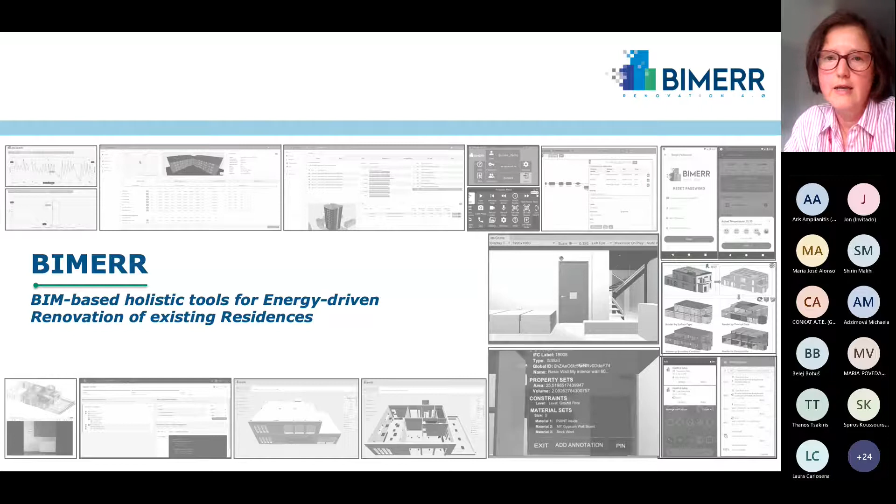I'm Otilia Kaitola, coordinator of the BIMERR project. I would like to also from my side welcome everybody to the final BIMERR Living Lab. BIMERR stands for BIM-Based Holistic Tools for Energy-Driven Renovation of Existing Residences. We are a team of 16 partners working on the BIMERR project, 10 industrial partners and 6 partners from research institutions and universities.

Before we introduce you to the BIMERR tools in more detail, I would like to present what we call the BIMERR Road or BIMERR Path. At the beginning of this path, we have a building to be renovated for which we may or may not have a digital model, more specifically a BIM model. At the end of the road, we'll have a building which has undergone an energy-driven renovation. So what BIMERR delivers is the software tools for in between, so to say, for the whole BIMERR road or path.

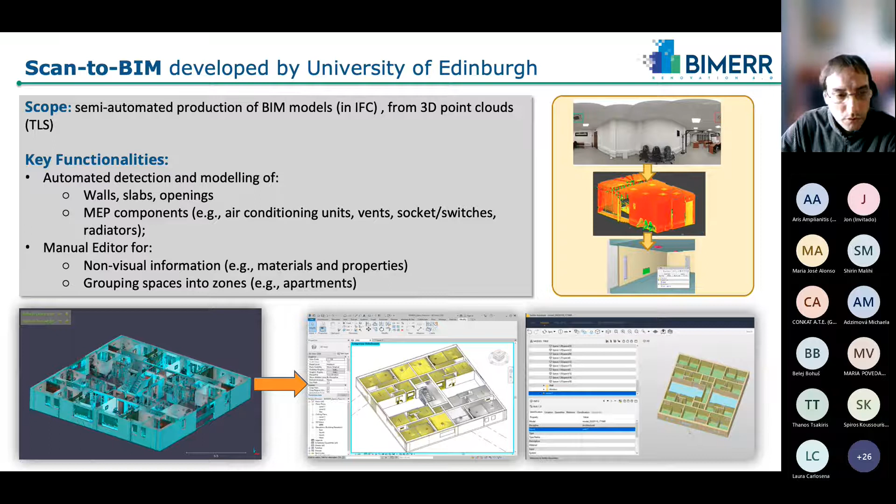This is important for doing energy analysis, understanding and allocating energy sources to where it is consumed. So for example, creating zones like where is there an apartment, so all the rooms that make up an apartment. Okay, next slide, please.

So what have been the lessons learned? We have applied this to a couple of different pilot sites. Very quickly, what we realized is that point cloud quality is very important, and we've been surprised with some of the point clouds we have received. Some of that is not the fault of the surveyor at all.

It's actually the fact that in the context of renovation, very often apartments are inhabited, and so there is a lot of occlusion inside the different rooms. It's very important for the automated process to work effectively that occlusions be reduced as much as possible. So there's a bit of planning and understanding of the process needed by the surveyor, so that they ensure, for example, enough data is acquired of a wall that may be mostly covered by a wardrobe. If there's a little part of it visible, they should ensure it's scanned.

We've gathered all these guidelines into a free guide, a paper we published called Laser Scanning for BIM. You can find that online.

Now, beyond this, we know some of the good performance of the solution. We believe that an automated or semi-automated scan-to-BIM process like the one we propose can save up to 40% in the scan-to-BIM process. Current practices would be to bring the point cloud into Revit and manually model from there, or ArchiCAD and other equivalent tools. But we think a semi-automated process like this can save up to 40% of that time. So really worth considering.

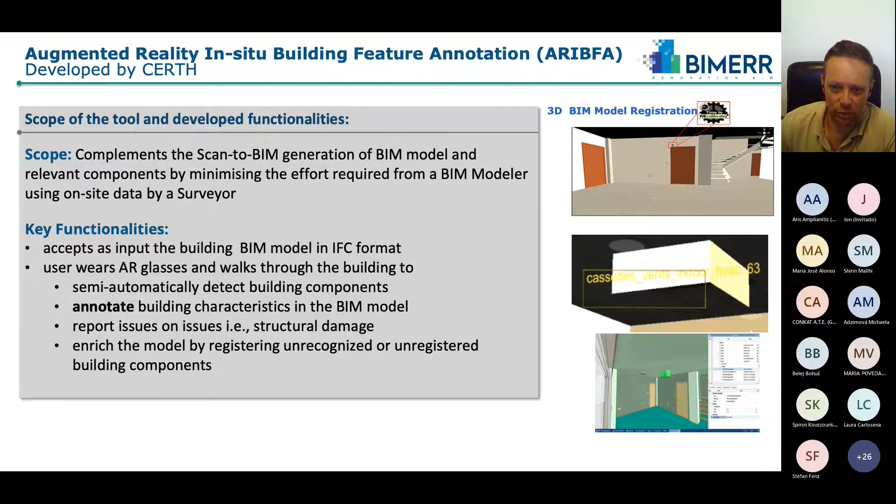Finally, one capability of this tool is to enrich the model by registering unrecognized and unregistered building components within the space. After detection, the user can update the model on our building information management platform, which we'll show in the demonstration video.

Some of the lessons learned through the validation activities performed at the pilot site: for the accurate registration of the BIM model in the actual...

I'm sorry, Maria, you're unmuted. Can you mute please? Thank you.

So for the accurate registration of the building on site, so the BIM model correctly follows the actual building, the 3D model should be split into floors and use a registration image target per floor to have better registration.

Since the application runs on a small device with CPU and RAM restrictions, the IFC editing functionality is challenging, so we cannot directly visualize changes when the user changes, for example, the thickness or dimensions of a wall. This is something to be done at a later stage.

Entering text is a generic restriction of all augmented reality applications. Since you are tapping into the air, it's very tedious for large text editing, such as descriptions of components and activities.

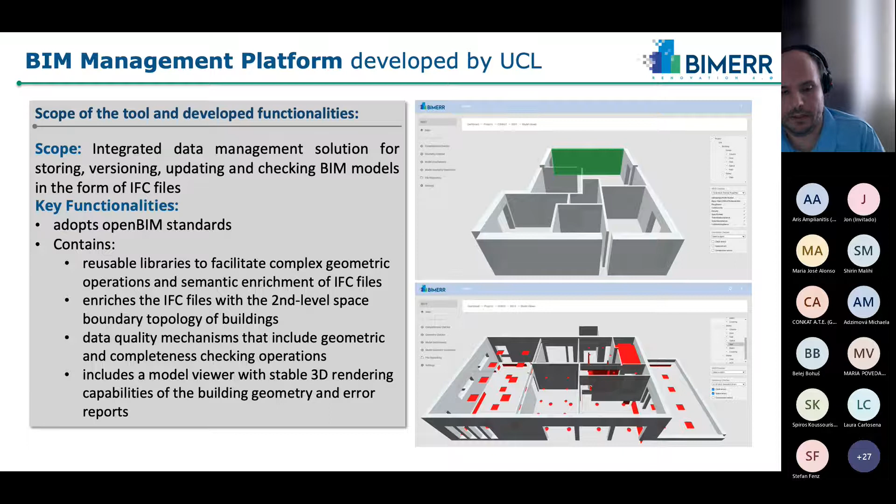Yes, so we have a lesson learned during the validation of this tool. As I said before, the digital twin platform provides OBJ files for the error part, for reporting the errors.

This is very useful for other tools that work in Unity or other platforms like ARIBFA, in order to send these files and visualize in low level all these errors to notify the users. Of course, the BIM management platform also provides other formats for error reporting, such as HTML, JSON, and BCF. We are using the BIM Collaboration Format, BCF, from Building Smart.

As I said before, we use this iterative process, so the designer uploads the file to the BIM management platform. And if the file has errors, we give the possibility to have different revisions of the same BIM model, and using this approach we can track all the changes and improvements of the model until we have at the end an error-free model.

And in order to help this file exchange with users and other BIM software components, BIM authoring tools, we are using ISO 19650 in order to have a correct naming convention for the file names.

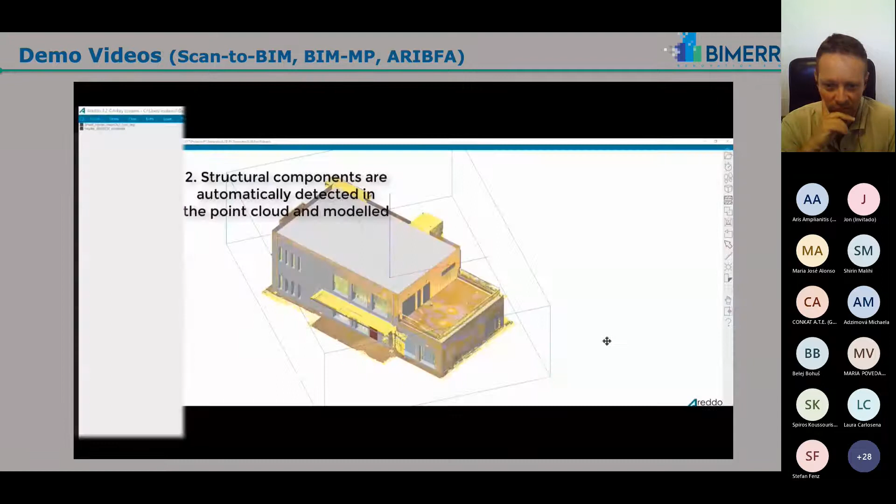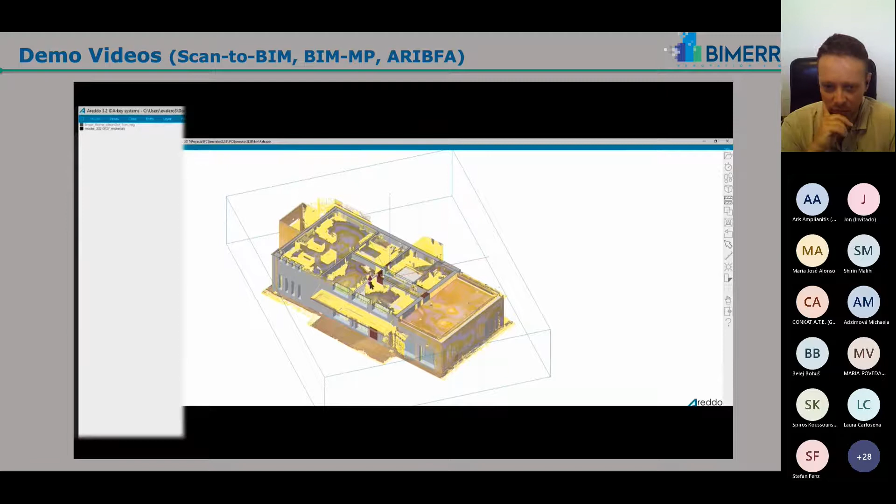First the floors are detected and separated into different elements. Then structural components are automatically detected in the point cloud and modeled. For example, the walls here are overlaid on top of the point cloud, and here you can see slabs as they were extracted from the point cloud. Then in the BIM model viewer, you can see how they are separated into openings, doors, walls, and windows.

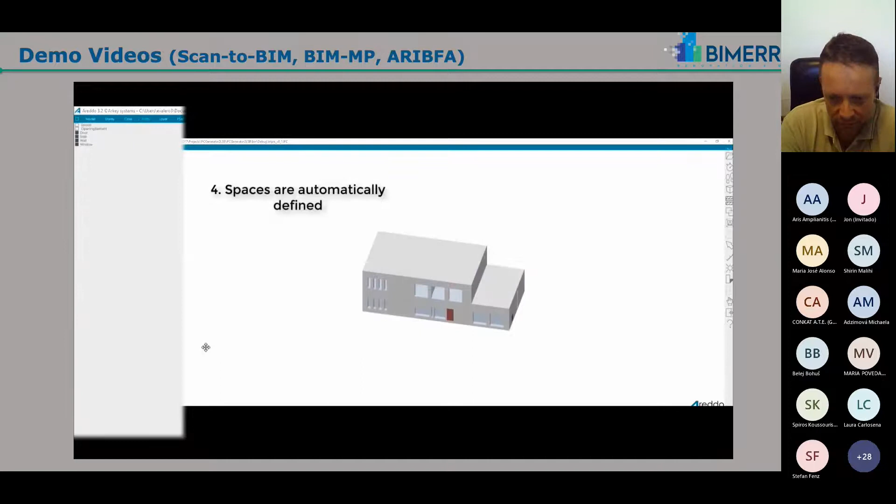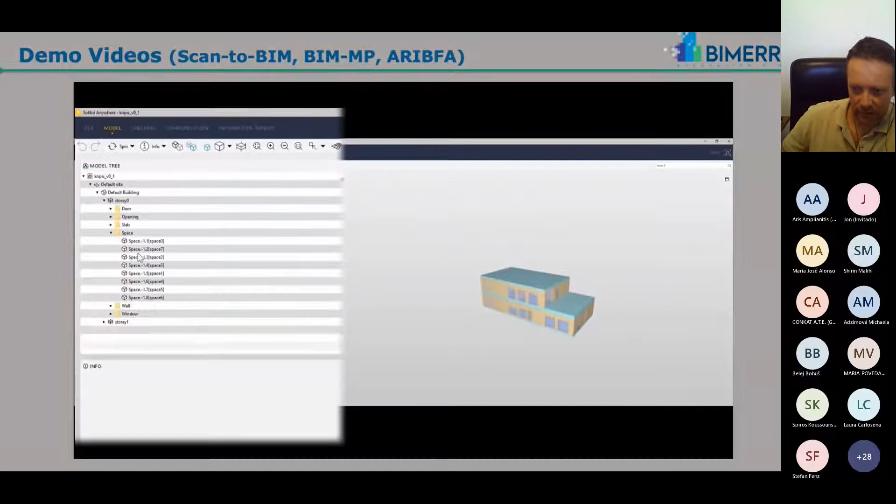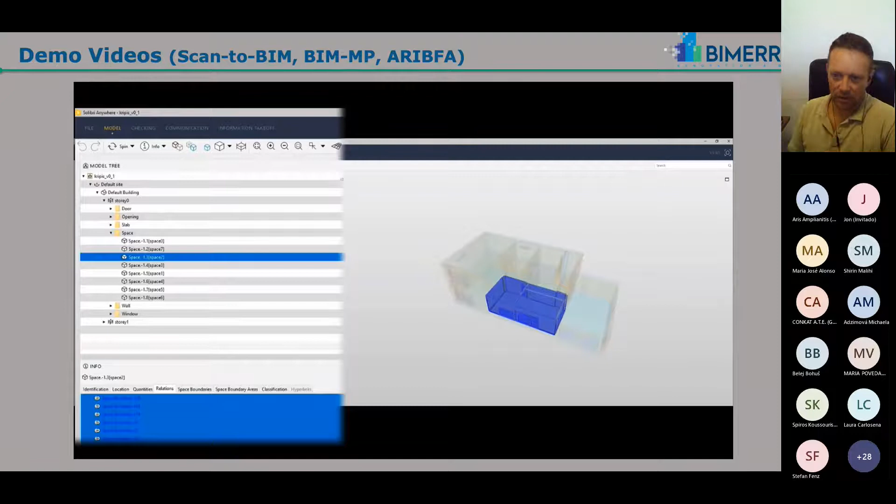These are automatically calculated, based on what adjacent spaces are combined based on their distances, generating second level space boundaries that correspond to different zones. These can be combined into zones, for example, to define apartments and other areas to be used in calculations, for energy efficiency at an apartment or common area level.

Here you can see the different second level space boundaries for the first floor and the second floor in Solibri. As you can see, the results of our scan-to-BIM solution are open in different existing applications.

Another capability of scan-to-BIM is to edit some of the parameters in these components. If you load the IFC generated by scan-to-BIM, here you can see the components as they are generated with the walls and slab information, the type of IFC element on the third column, the name assigned and the IDs, and the thickness on the last column.

For any of these type of components, you can select the category, and here you can change the materials. You can select the general category of material, concrete, subcategory, and the exact material used, and finally define the thickness of this element.

Just to add that these elements come from a database that will be presented later from another partner. It's a web server that contains materials that are commonly available and used.

Yes, correct. This material database is loaded within this application, and it is also used in other applications as well, as we will see in the next stage of the project. Now, after that, we have the profiling, residence, and usage system.

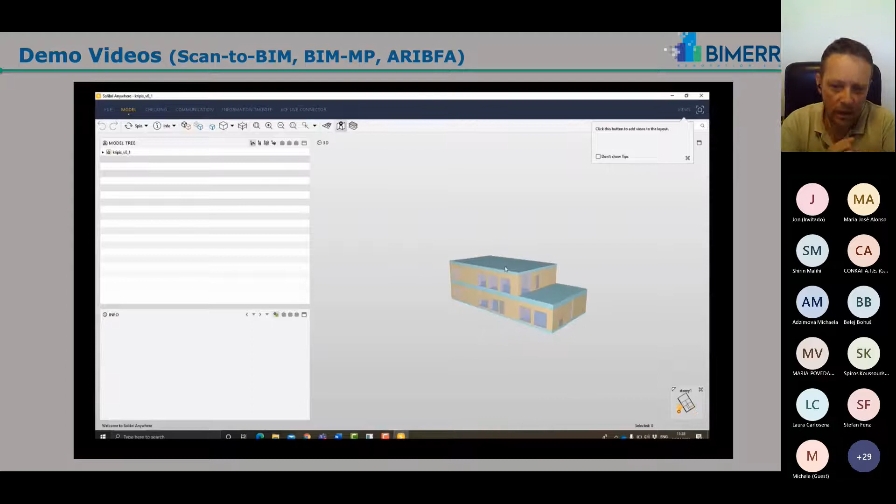The end result you can see here in Solibri, where when you select, for example, a slab, you can see the thickness added in the previous step in the editor and the material used, concrete.

Finally, these spaces are merged, as I said, into zones, defining different apartments in different areas in the building. Here you can see the creation of a new zone, and this is how it appears in a visualization tool like Solibri.

Finally, these are uploaded into the interoperability framework of BIMERR as an IFC file and assigned to a specific project. With project here, we mean the specific building the renovation is going to be performed on. This is information that we extract from the interoperability framework, the IDs of each project and the URLs to be used, and this will be explained later on into that particular tool of BIMERR.

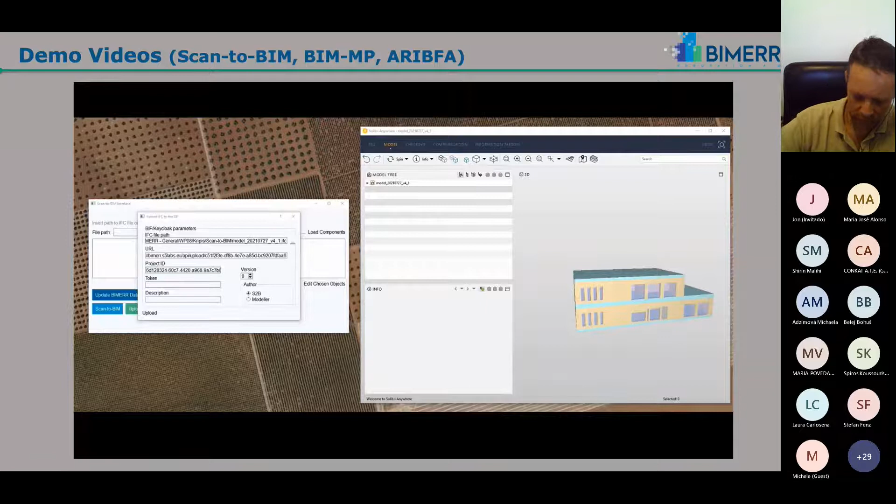Now, once the model is uploaded, we will go on to the next stage where it is processed by the BIM management platform, which is used in order to perform, as Kyriakos said, some checks on the building, for example, for geometry and completeness of information for its components.

So this is the model that we have uploaded from scan-to-BIM. We can check it with the integrated 3D model viewer, and then we can run a geometry checker in order to detect any problems within the geometry itself, for example, overlapping elements and things like that.

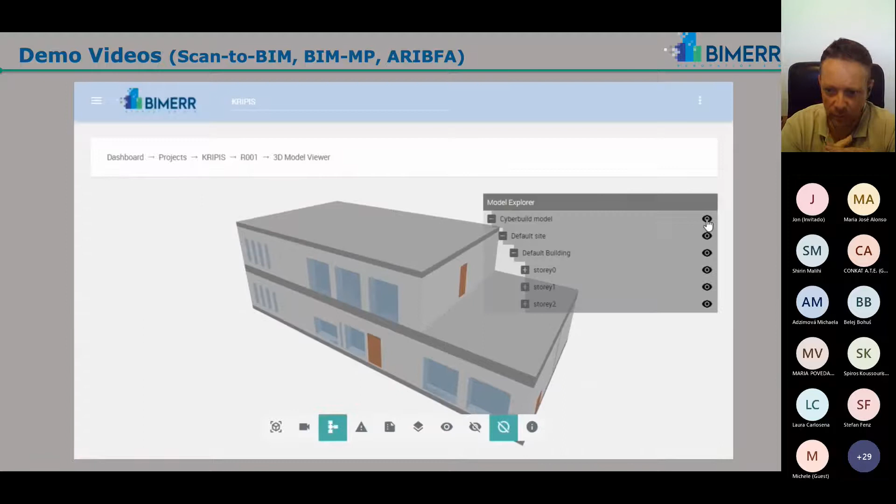After the check has been performed, there is a report that shows some errors detected, and we can see here how we can separate different elements of the building by story. You can see here a clash error, for example, a wall overlapping with another wall, and they are indicated by colors.

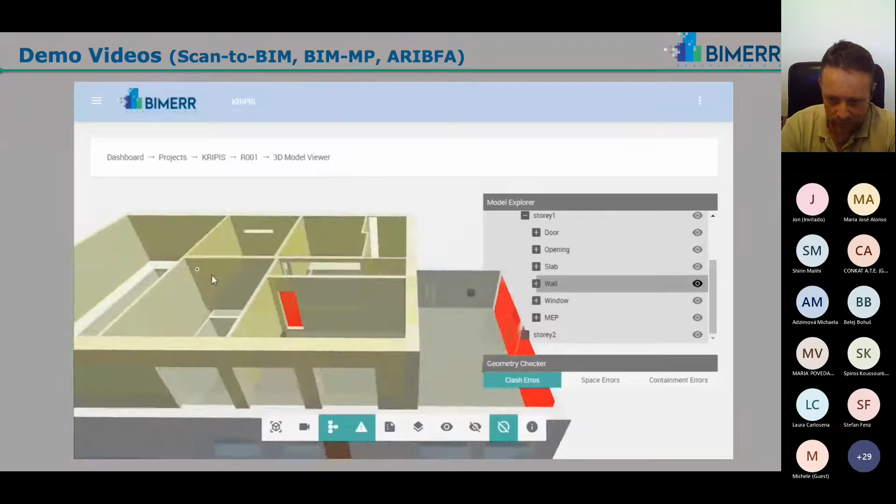And here's the report as it comes out. After the geometry check, the checked model can be uploaded back into BIF with the changes, with the report attached in the BCF file.

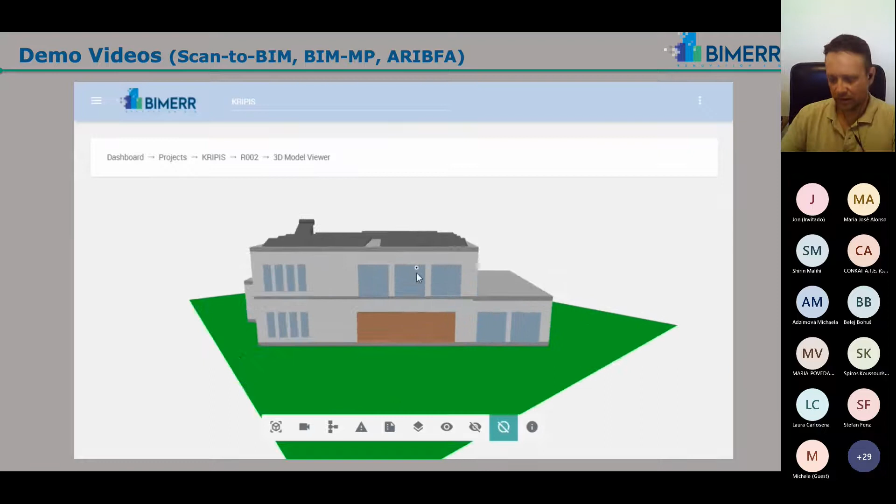Here we can see the same process as we can perform it on an externally generated model, for example from a Revit file. This is the model as it appears after it's been imported from the Revit exportation into IFC format, and we can do the same kind of check that we presented earlier into this model again.

And here is the final result and the report. This one was error-free with regards to geometry.

The second functionality for checking is completeness of information regarding the components. So what information is missing from different elements that needs to be there in order for the model to be considered complete.

We will see the report generated for this particular model. Here you can see for the thermal properties of some of the elements, we had 99 valid instances and 1 invalid. If we go back to the 3D model viewer, we can check where that error appears. It is based on a slab of the building, and the missing element information is the roughness, the conductivity, the density, and some other parameters.

So we can go back and modify these parameters and add this, for example, in ARIBFA, the tool I showed earlier in augmented reality, or in Revit, or in any other tool. And then we re-upload, and the completeness checker will provide zero errors.

Now the CBIP tool is used in order to extend and enrich the file with this information. And the final model extracted from this operation is the enhanced IFC file that can then be considered as the final version of the model, with all geometry and completeness errors corrected.

May I add something? Yeah, Yorgos, please add, or whatever you want.

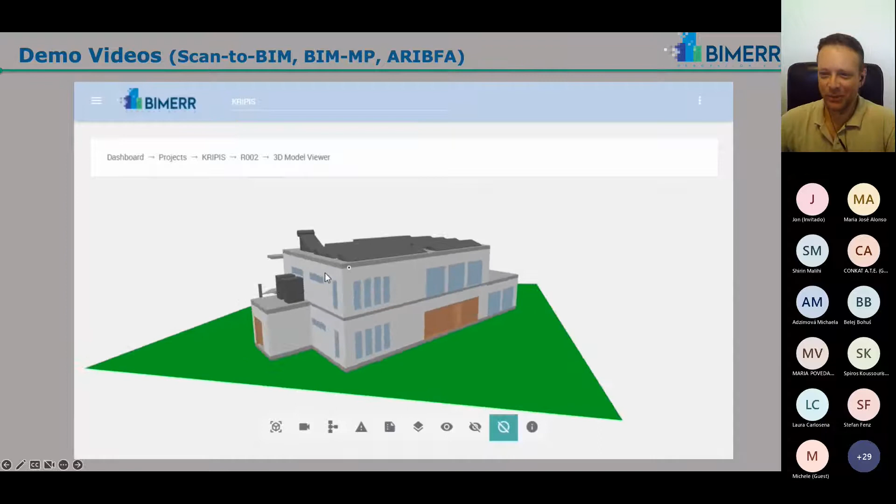I'm Yorgos. Anyway, yes, so CBIP enriches the model with the second level space boundaries that you see in this video. The second level space boundaries are essentially surfaces for thermal flow exchange among building spaces and the environment. So it's important for this information to be inside the IFC to have a complete and correct energy model in order to perform energy simulations. CBIP does that.

Thanks. Thanks, Yorgo.

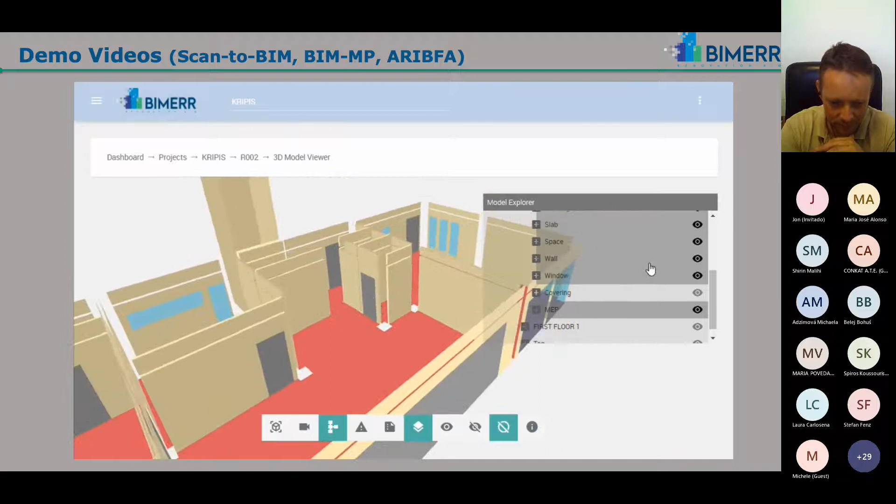And this is the result after the generation of the second level space boundaries. As you can see, we can separate different elements and visualize just the ones that we need.

Yes, also the surfaces that you see have different characteristics with different colors. And also I would like to add that the MVD checker also performs checks for the topology of the second level space boundaries to ensure that it is correct.

Now, at the end, we generate, apart from the IFC file, also some different models. Inside BIMERR, we use a building data model definition. We also see here the MVD files and also the CBIP generated enhanced IFC file. We can synchronize all these files with the building interoperability framework so the latest version of everything is uploaded.

Now, part of this is the generation of the OBJ files, the mesh 3D models that are used for visualization in other tools like ARIBFA. And as I said earlier, the MVD file that was generated through this process can be uploaded and used from other tools, from BIMERR and outside BIMERR.

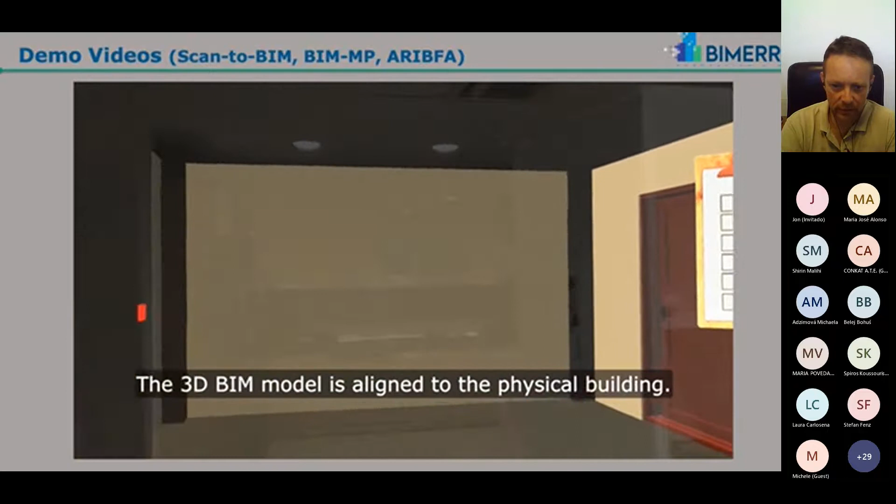Which is scanning for an image target. You can see an image here posted on one of the walls, and that corresponds to a specific location in the BIM model. And then you can see here overlaid on the actual building the BIM model of the building as generated in the previous step.

Now, if we anchor the 3D BIM model, it's going to stay there and we don't have to re-register again. Now, the user can have some speech commands, as I said earlier. For example, 'show location' can tell the user what IFC space they are currently in.

So you can see here, we are in kitchen number whatever. So the user knows exactly what space they can modify, and what parameters they have to modify.

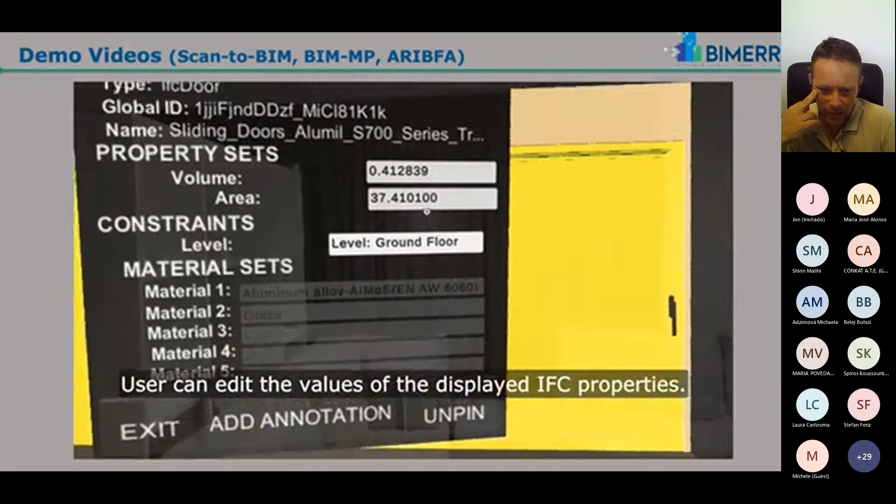The IFC properties of each element are demonstrated by clicking directly on the element, as you can see. Some parameters can be directly modified, for example dimensions and thickness.

Here we can see the capability to add annotations to different elements, that can be used later on by other users.

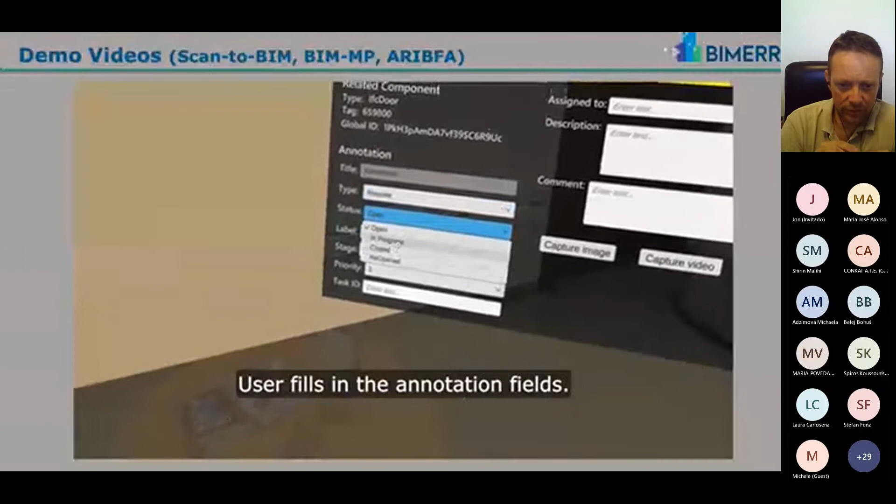This can be sent, for example, to the construction company to indicate some remedial work that needs to be performed, or the status of the work that has been done, the type of annotation, if it is regarding the architecture or the stages of construction, and what priority to be given to this annotation, some description of the annotation, and also in the future to provide some media attached to that annotation, for example capturing an image or photograph coming from the camera of the AR headset.

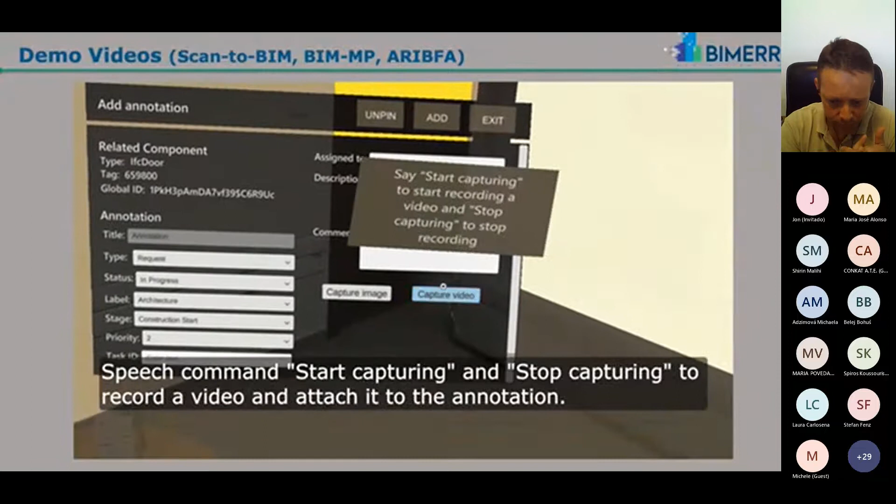The user can also capture a video, which can be used in order to further indicate what needs to be done in this particular case. Now this annotation will stay in place even if the user logs out, and then they can reload that annotation and see what has been done.

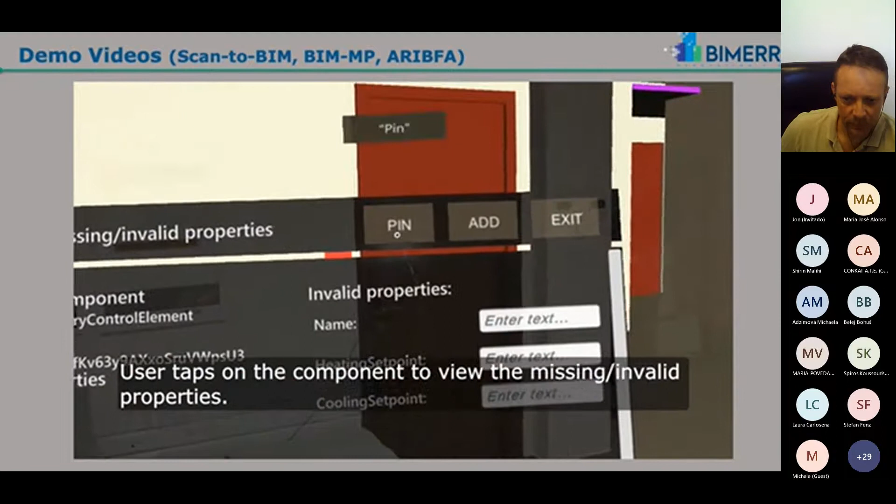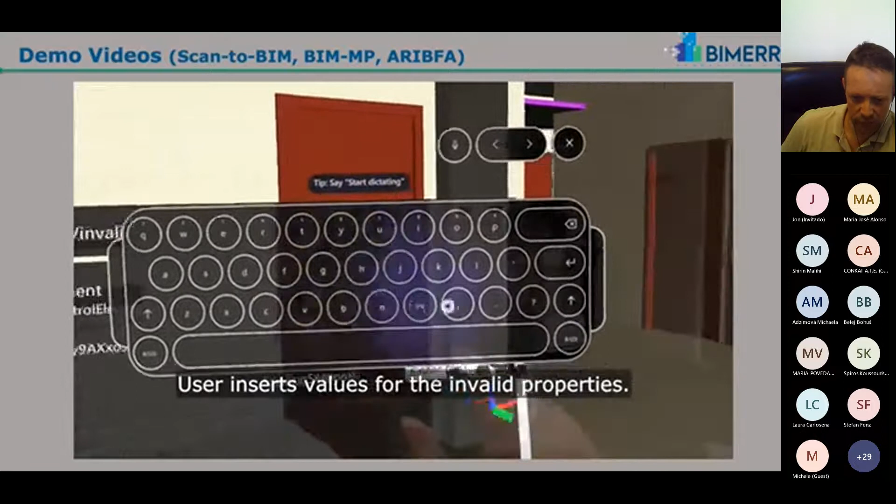The capability to add missing element parameters is done by clicking on the component. You can see here that it's missing some properties, for example a name, heating setpoint, and a cooling setpoint for this thermostat. This was indicated with a red color. So for any element in the building that we have missing parameters, we indicate it with red.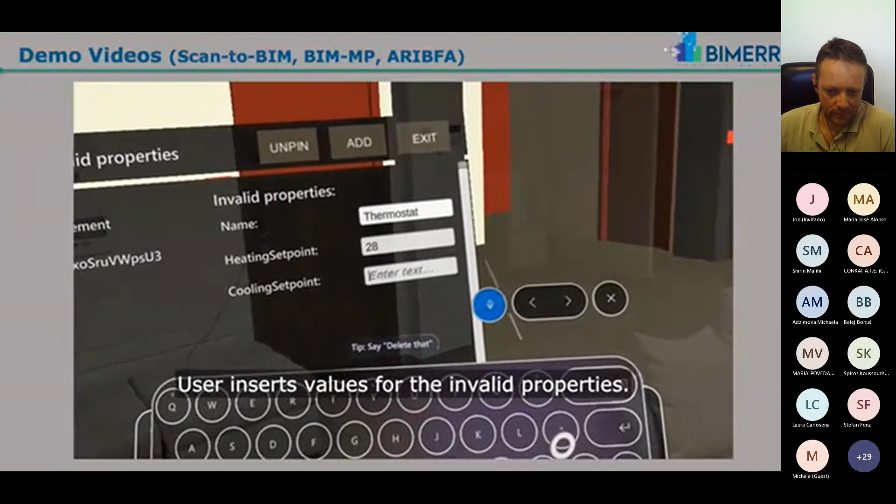The user can also use, as part of the HoloLens capabilities, voice to text. So these numbers can be added by just saying 28 or 18 in this case.

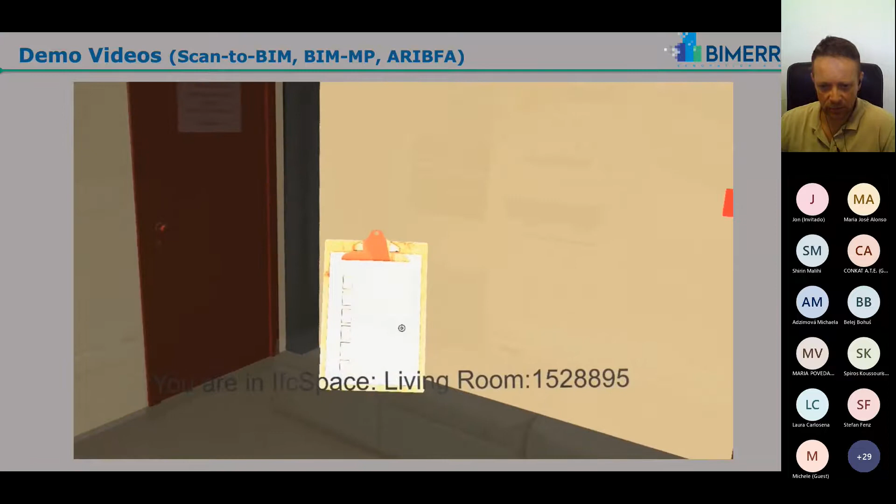Also one of the capabilities is to see the tasks that have been generated in the PWMA toolset. Here you can see, for this particular IFC space, this is the list of tasks relative to it.

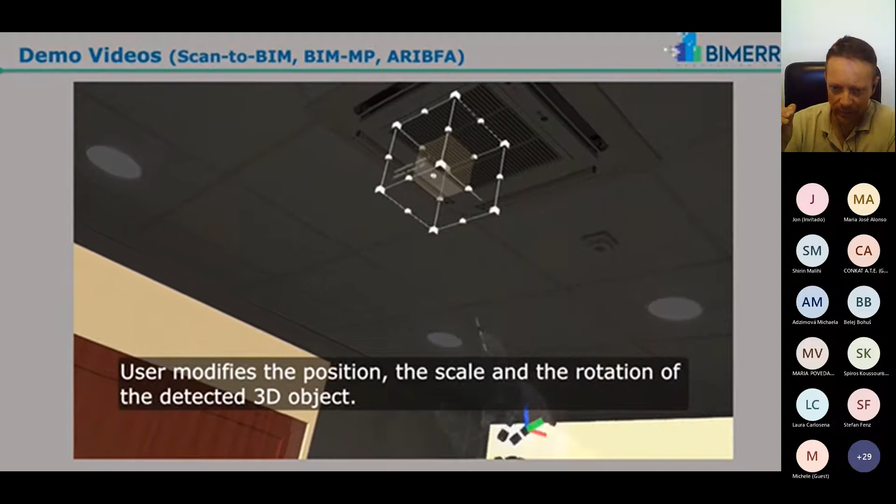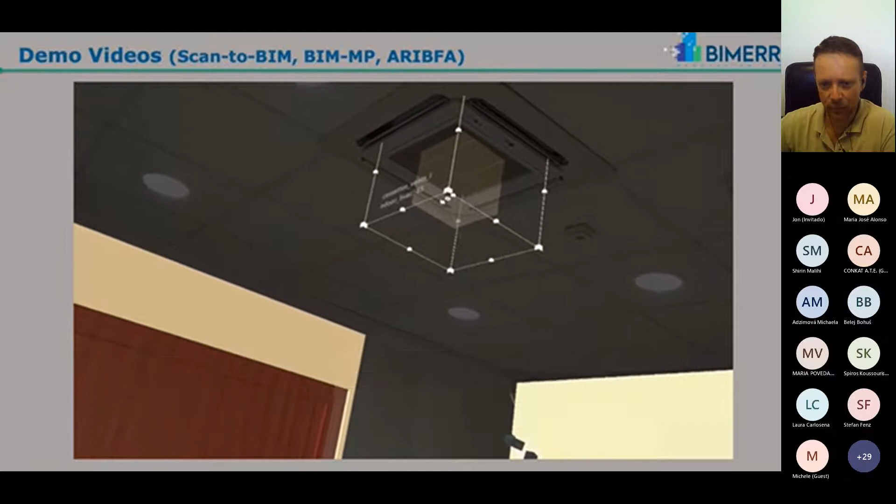Finally, the capability to add an MEP component to an IFC model is demonstrated here. We are using the server, as I said earlier, that detects this cassette, for example this air conditioning cassette. Once it is detected, the user can add a placeholder cube in the place of the element. Unfortunately, we don't have the capability to add a detailed model that matches an air conditioner, for example. We just add a placeholder element, and we can add the parameters of this component directly into the model.

So if we enter that, we can add the relevant parameters. Since this is detected as a unitary equipment, for example electrical equipment, we can add heating points, cooling points, capacities, specific type of handler, air conditioning unit, split system, etc., based on the detected type of element.

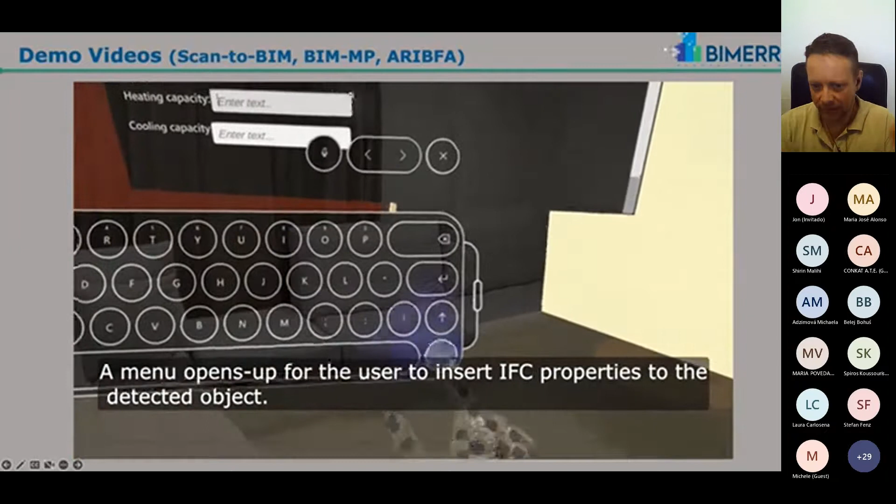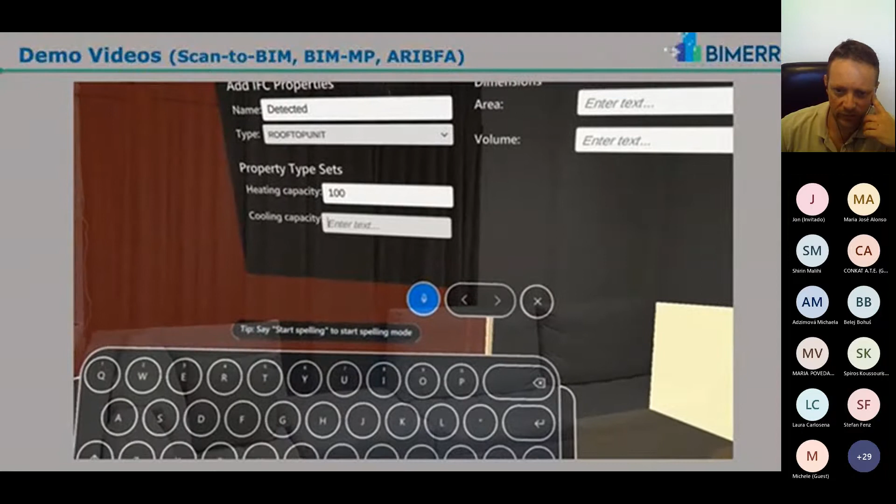Once this is done and all the elements have been detected and all the parameters have been added, the user can upload the edited model directly into the interoperability framework, and this can further be propagated into the BIM management platform, again to be checked for geometry and completeness errors.

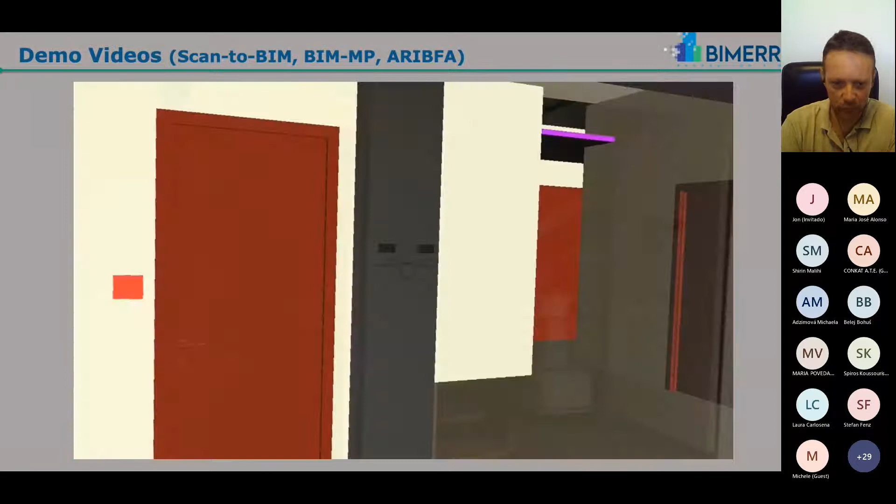This is the part where we are exporting this into IFC. Finally, the user can quit the application at the end here. When they quit, you can upload the changes they made and create a new version. Based on the version number, you can see in the BIM management platform that we have a new version if we synchronize.

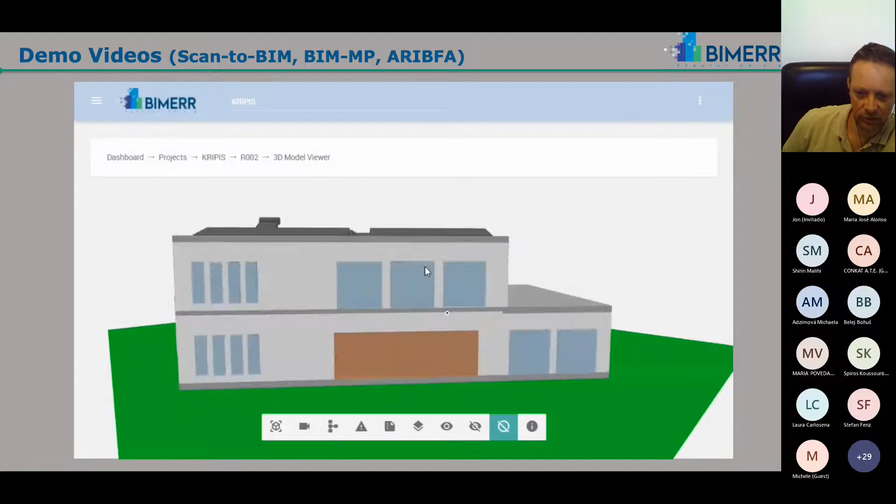This is a completeness-checked model, and this is the final model with the changes we performed. You will see here that if we go inside the space we were in earlier, it's missing the element that we detected earlier. But if we perform a synchronization and download the latest version of the model...

Now we have a new MVD report, and we have a new HVAC added. Something to add here, that we see we have 13 valid instances, and now we are going to proceed with synchronization. So now we will see one more instance, that is what the ARIBFA application has added before.

See, here there's a model uploaded by ARIBFA. It is pending checking. And finally the model has been generated.

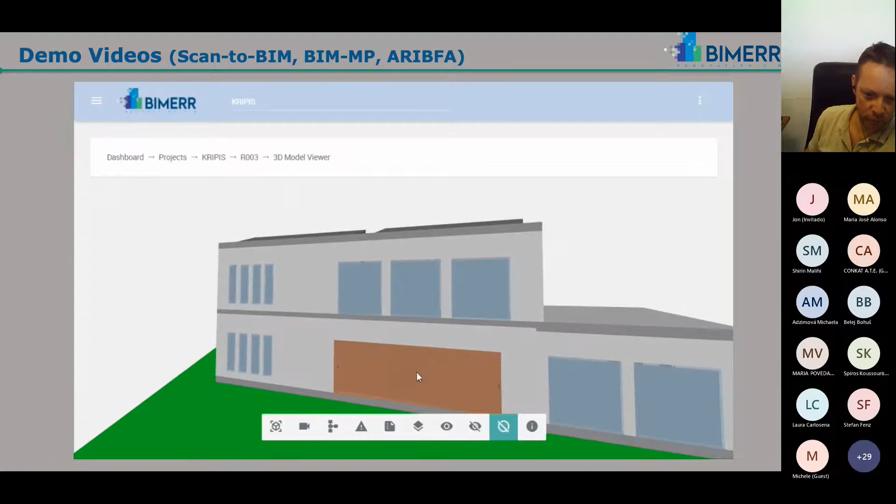Going back into the living room where earlier, you will see the cube we added that has been placed on the ceiling there. And if we run a completeness checker, we can see here that the new parameters have been added for this element.

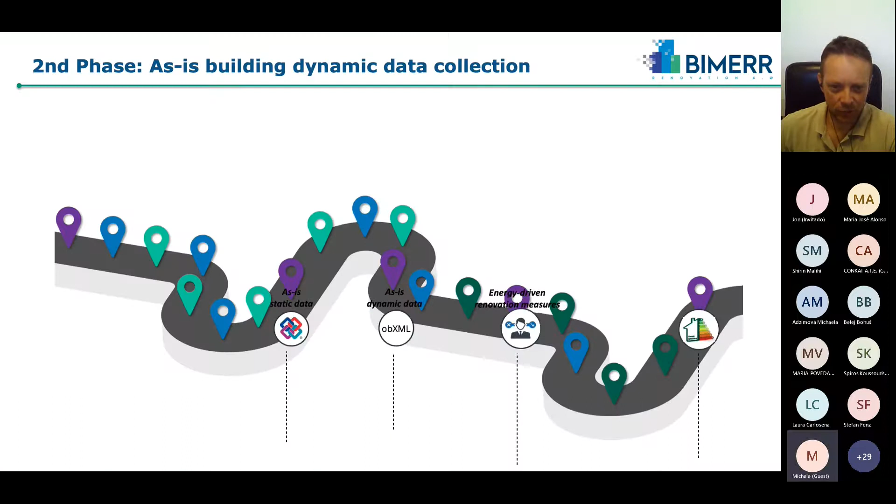And we have 14 instead of 13 that we had earlier. Here is the report, and then you can see here at the end, a detected model. And it is a valid model. And this is then uploaded into Brief, and we will go into the next section, and somebody will explain this better than me. Thank you very much.

Aris? Yeah, I'm sorry, I was muted.

So with this, we conclude with the first phase of the BIMERR tools, the tools that are used to collect the as-is building static data. In that case, we have reached the first milestone, and we proceed to the second phase of the as-is building dynamic data collection. In this section, as Ottilia mentioned, PRUBS and BICA are being used. So we shall proceed with these tools in this section.

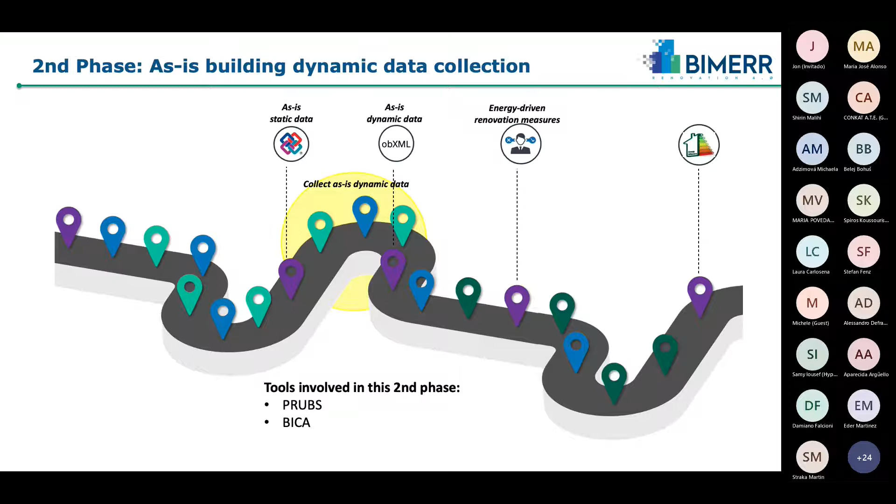Then again, any questions or comments? Right, that seems to be the case. We can then proceed, I suppose. So, Yorgo, the floor is yours.

Hi, Aris. Hi, everybody. Can you hear me? Yes. Okay, great.

So now we're moving to phase 2, where we actually go beyond BIM, and more precisely, we collect first dynamic data required as input for more accurate prediction of the as-is building performance and for the impact assessment of potential renovation measures before being applied in reality. And the second, residents' feedback concerning the current status of the building, indicating its weak points and occupant comfort zones. And to meet these requirements within BIMERR, the profiling of residents' usage building systems service, PRUBS, and the building information collection mobile application have been developed and delivered. And I'll start with PRUBS.

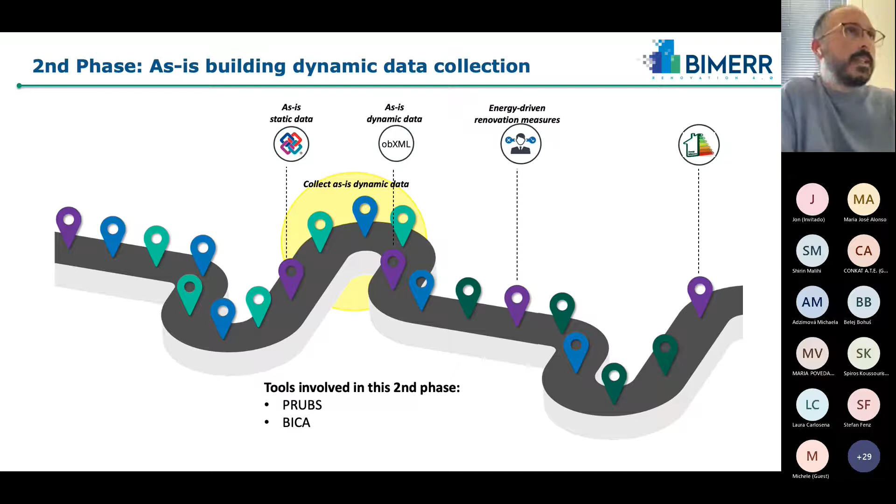Aris, next slide, please. Starting with its scope, actually PRUBS's scope is to train occupant behavior models, which are actually formulas that, given specific inputs, can predict, simulate, or forecast occupant comfort bounds, presence, and residents' control actions upon energy systems. Actually, the trained models are mainly used as input to building energy performance simulations performed by another BIMERR tool that we will present later on. And the main scope is to improve the accuracy of the BIMERR simulation engine results.

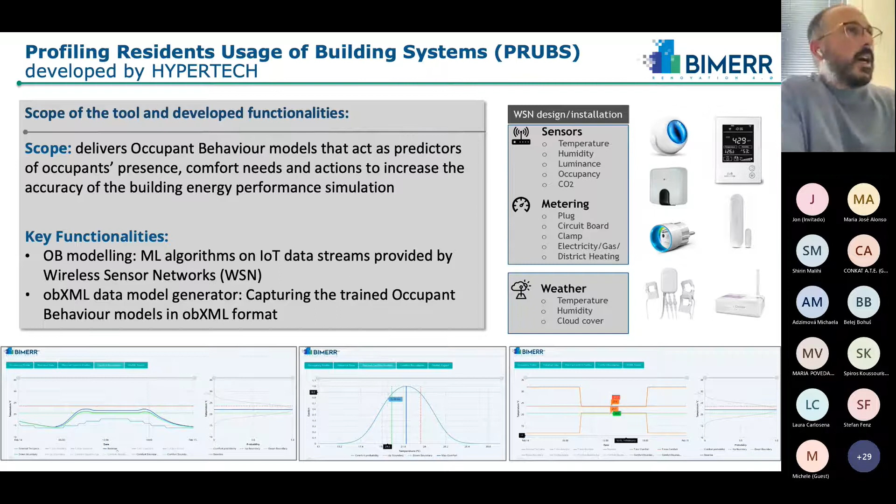Next slide, please. Actually, PRUBS does not provide a user interface, but it is a backend service that feeds other tools of BIMERR, mainly the BICA application that we will see after this slide, and the renovation decision support system. So end users have not been involved explicitly in the demonstration validation activities, but implicitly through the evaluation of the resulting energy performance KPIs for each site.

From the developer's perspective, though, we learned through the validation and demonstration activities that the commissioning and health monitoring of the IoT equipment is a challenging task and requires significant effort. While frequent maintenance and continuous remote health monitoring of the IoT equipment leads to IoT data of high quality and granularity, and consequently to more accurate dynamic data, which means that with more accurate dynamic data, we can somehow reduce the gap that occurs between measured and simulated energy performance of the building. In this slide, you see some images from IoT equipment that has been installed in our pre-validation and validation sites. And that's it from my side.

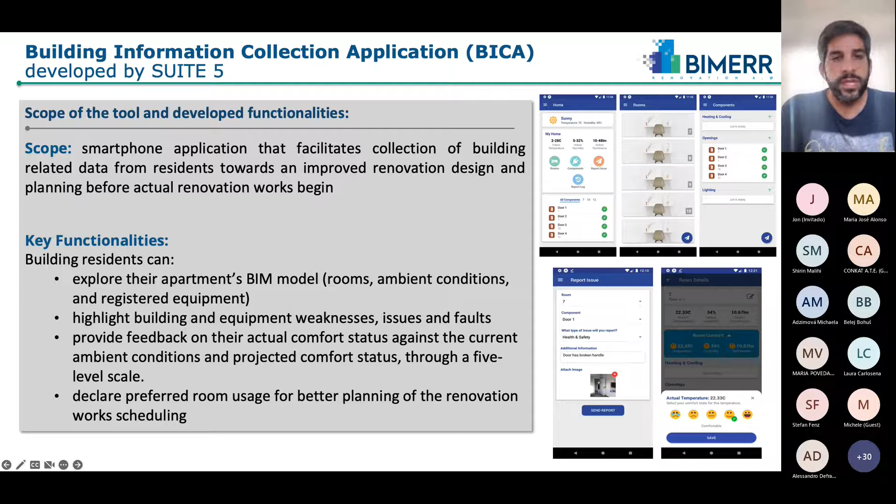In terms of lessons learned, as far as the developers are concerned, we identified that early availability and correctness of the respective building data model and its formations, such as the building, zones, spaces, and elements contained, is a prerequisite, along with early and continuous validation that the relevant fields, such as the space ID and rooms, are included in the apartment sensor data, so that the user can see the correct installation room of the devices.

We also need to have users related to specific apartments, so that they can see the information of their own apartment. Now, in terms of lessons learned for the users, we got some valuable feedback.

The feedback said that the BICA app is helpful for building managers, and it's non-intrusive for the residents, as normally you have to bother them to ask their opinion or ask for any issues they can report.

Users recommended having a detailed instruction manual to help them install the app, as well as a multi-language interface, which will attract more users who may not have English knowledge.

You can see some screenshots of the application on the right-hand side, but we will go into detail and show more in the demo. That's all for BICA.

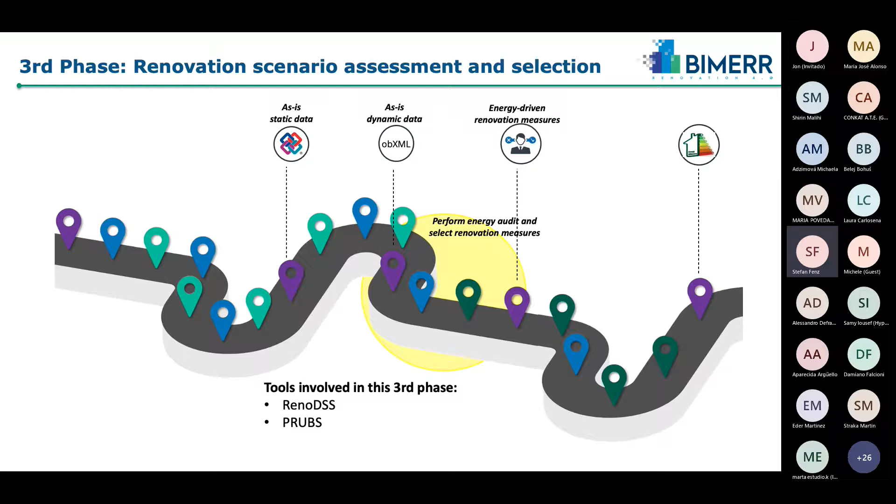We have energy KPIs, like heating demand. We have sustainability KPIs, which is about the global warming potential. And we have financial KPIs, which is, for example, the costs of heating or cooling of the building and also the operation of the building. We calculate these KPIs once for the baseline building, as it is, and then for each renovation scenario. One renovation scenario is, for example, a building with 30 centimeters EPS insulation on the outside. We calculate how much this costs in terms of construction, and how much energy savings this will have in the following years.

So everything is web-based. The entire software, Reno DSS, you can access over the web browser and configure your renovation scenarios. For each renovation scenario, we output a PDF report, which has all the details lined up of the renovation scenario, and also an IFC file. This enables you to take the IFC file, which is an output of Reno DSS, and use it within your favorite BIM editor afterwards.

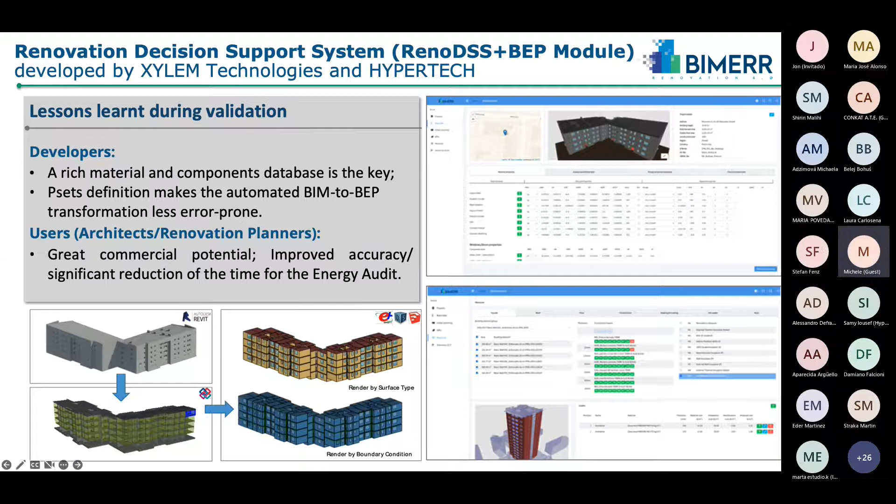You select a project, and what it does is load the IFC file of this project I mentioned before. It gives you baseline data right on the right-hand side, like how many square meters, what construction year. It shows you the location on the left-hand side. And then on the bottom, you see the materials I mentioned before.

So you have different materials from the baseline, like concrete, insulation material, and so on. And if you click on the green button, you get this material properties window, where you can fill out missing properties. For example, if you get an IFC file, you might have the thickness of the material layer in the IFC file, but you might not have the correct conductivity value or global warming potential of this material.

So it would be a lot of work to research this on the web. Therefore, the BIMERR material and component database is there, where we have a lot of building products and components inside. So you can simply look for a similar material here and map it to your component. This speeds up the data input effort significantly, as you can imagine.

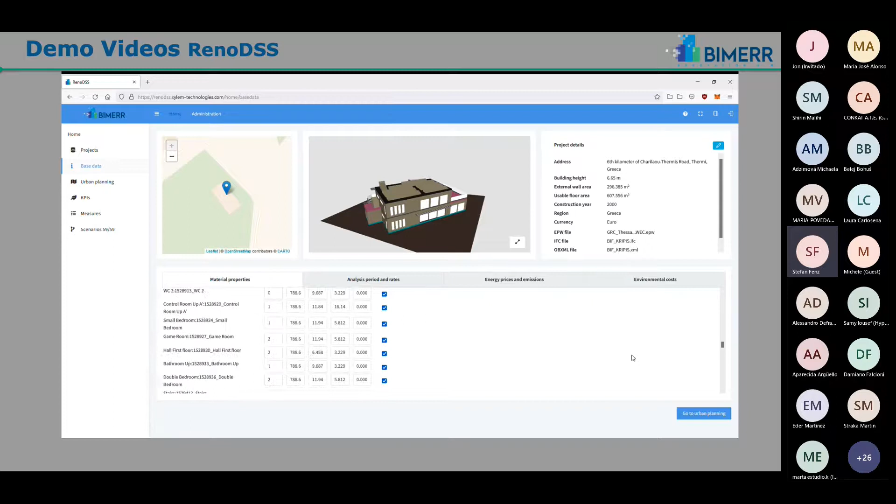And the same we have for building materials, but also for windows and so on and so forth. The rest is coming like, we take everything we can get from the IFC file, and what's missing has to be completed in this exact phase you're looking at right now.

Apart from that, you can configure other stuff like analysis periods. You can configure the sustainability parameters or the cost of electricity and escalation rates and so on and so forth. So for the LCA calculation, you can fine tune a lot of parameters here.

This is what you see is the urban planning module. So we are not only considering the building for itself, but also in relation to its neighborhood. You see here the network grid in the surrounding area, in this case electricity lines which are in the streets.

This is demo content. And you also see how the energy flows in this neighborhood are. So basically, we have an input for each building, how much power is when produced and consumed.

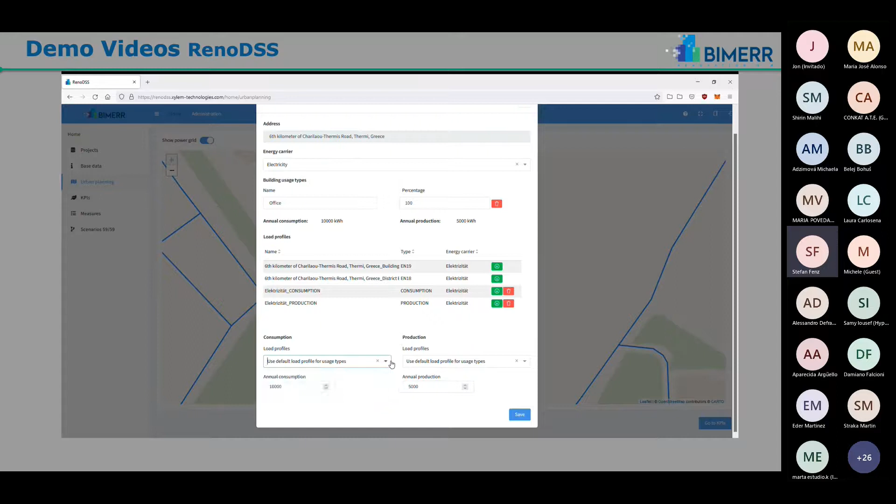The same for our building, for our renovation project. And then we can see how much power is flowing in and out from the buildings. Because if you're taking a bigger perspective, you can also say that it might make sense to install, for example, PV on the neighboring building if this provides the necessary roof space for it.

Here you can see the KPI view. The KPIs I mentioned before are listed here for the baseline. So you have the sustainability, energy, and economic KPIs. The energy KPIs are coming from the BEP module from Hypertech. We also have time series data, so not only static data, but time series data as well. The economic ones are coming from the LCC, and the sustainability from the LCA module as well.

Here you can define the measures.

So if you have the baseline building, you can define what is reasonable for this building, for example, insulating the walls, insulating the roof, changing windows, and so on. On the right-hand side, we have default constructions you can choose. You simply select the building element, in this case, the outer walls.

You define the conditioned side of this wall, and then you select one renovation construction, which is, for example, take off the existing insulation and put in new insulation. You can see below the materials we use. You can also try 10 centimeters of insulation, or try 12 centimeters, and see what performs better. You can duplicate the layers here to create alternatives.

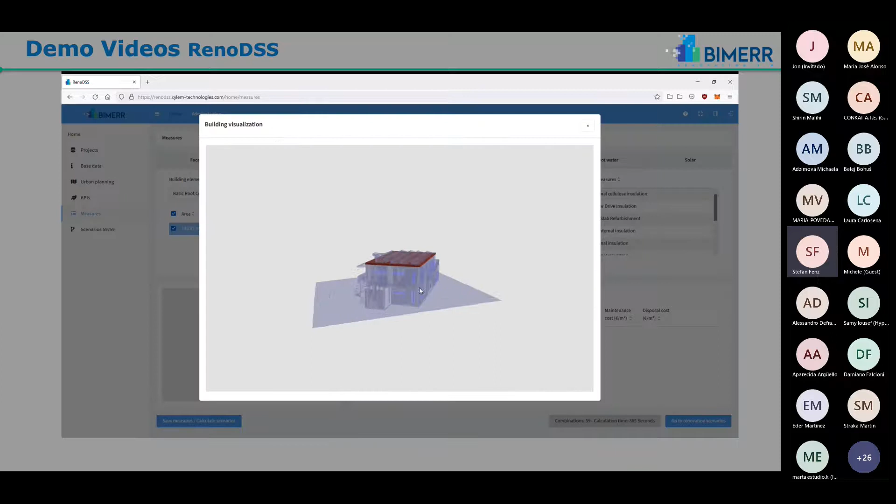The same goes for the roof. A roof is shown here, and you might insulate this roof or do other things with it. Also for the roof and floor constructions, we have default constructions from our library, and you can tell what kind of layers come out of this construction if you put a new one on, so you could say, for example, I would like to remove the old insulation and put in a new one.

And for windows, it's a little bit easier, I would say. So we have the windows, you can select a group of windows, and then select a new one, and this would be applied to this window group afterwards.

For all the renovation materials, you can change the parameters you're seeing down here, like the installation costs, construction costs, maintenance costs, and disposal costs. This affects the LCC KPIs.

Here we are at the last screen of RenoDSS, which is the scenarios. Once we know what kind of measures are okay for you, RenoDSS automatically generates different permutations of these measures, and this forms the scenarios. So one scenario might be 12 centimeters EPS with windows exchange, another would be 20 centimeters exchange with rooftop insulation. You can imagine there are quite a few combinations, and these combinations are then listed here.

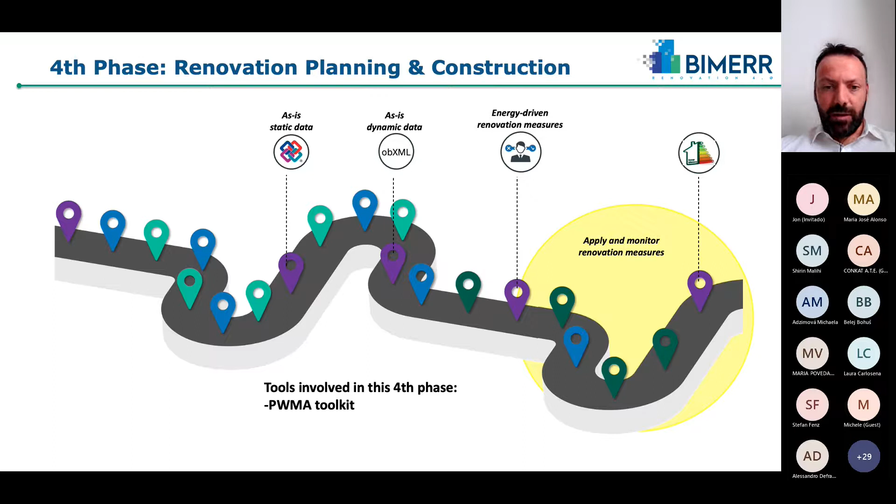The first part will be about the modeling component, including the simulation toolkit. This component is responsible for allowing the graphical definition in form of a BPMN process of the renovation process, and this definition allows also to simulate in order to optimize and have a decision support system for improving the process in case of unexpected events.

The key functionalities of this toolkit are mainly the possibility to have a first design thinking workshop in order to define the requirements and the digitization for the renovation site. There's also the possibility to create this renovation process model in form of a BPMN model and have a business process management solution, and the possibility to simulate and analyze this renovation process model in order to check first if the model is correct.

And then evaluate the times and cost of such kind of process, to collaborate on the renovation process definition, and also document the process by integrating with platforms like Microsoft Teams or Atlassian Confluence, and also to define risk and key performance indicators, so KPIs, associated to the process.

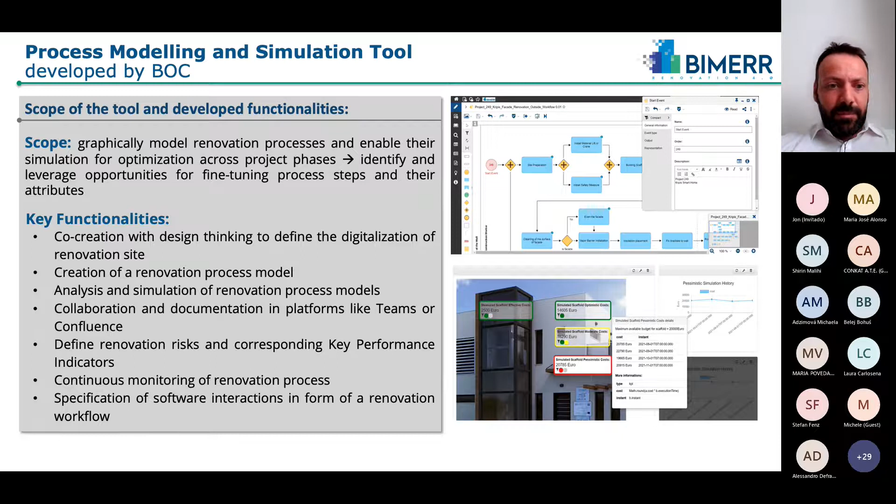So what we learned during the validation is that actually in the modeling phase, we really found helpful the usage of templates, predefined templates that define different types of processes. These templates are used to reduce the modeling time, but are also seen as useful for the definition of KPIs and for the parameters needed by the simulation.

For the user side, we have seen that this tool is not used mainly for the execution level, but mainly for the planning and management of the renovation process, so extracting the knowledge and also collaborating. And the complexity is adequate for the work that had to be done.

This is also in relation with Gartner, who defined this tool as a Customer Choice Award of 2022. And of course, this is after the minimum set of knowledge that the user needs to have, like the knowledge of the BPMN process, which can be acquired through training, freely available for example from the BOC company, or by any other external partner or consultancy company.

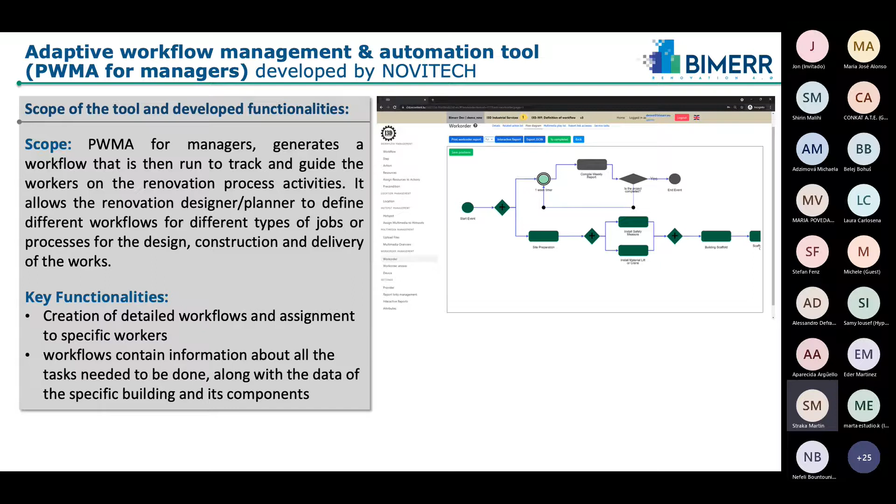There are several lessons that we learned during the development and validation phase. According to the developers, the first point is that the work processes should be more diversified, and we should have the ability to assign multiple work orders, multiple work providers or workers to a specific task, and also multiple locations, because this was directly requested by the stakeholders.

The second point is that the status of currently working providers could be visible to the managers in the PWMA for managers, for easier planning and mitigation measures if there's any issue or problem. A third lesson learned, albeit a minor one, is that the process of KPI measurement and calculation could potentially be partially automatized with the PWMA toolkit, but this is a minor suggestion.

Regarding the lessons learned from users, the PWMA for managers provides an effective and seamless experience for managers, which allows them to efficiently manage work, data, and persons of interest.

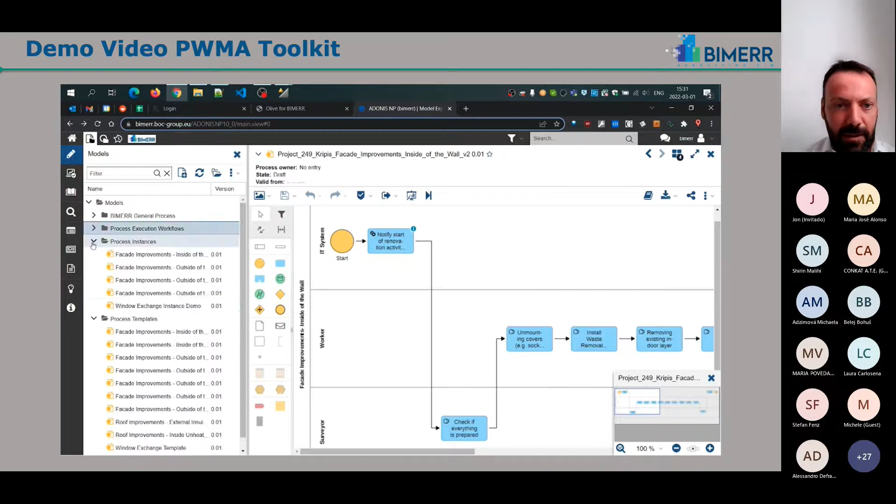So adding, for example, service activities that are automated, or improving the description of the manual activities. Like in this case, we added some automatic activity at the beginning made by the IT system in order to notify the user about the starting of the activity with some parameters needed by the services. These models are then...

used, exported, we'll see later in the execution environment. In parallel, we can create the KPIs.

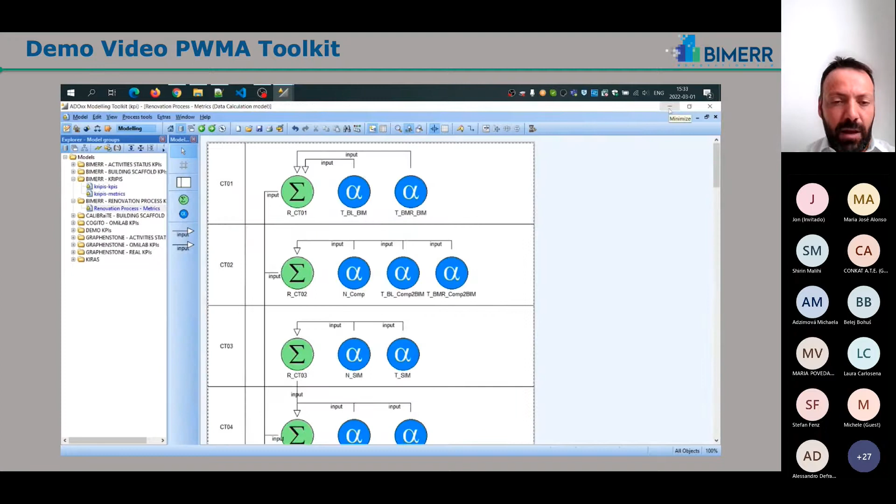Before actually performing the simulation, during the modeling phase, the modeler can be helped by this formal verification toolkit that allows checking structural properties of the model in order to validate the correctness.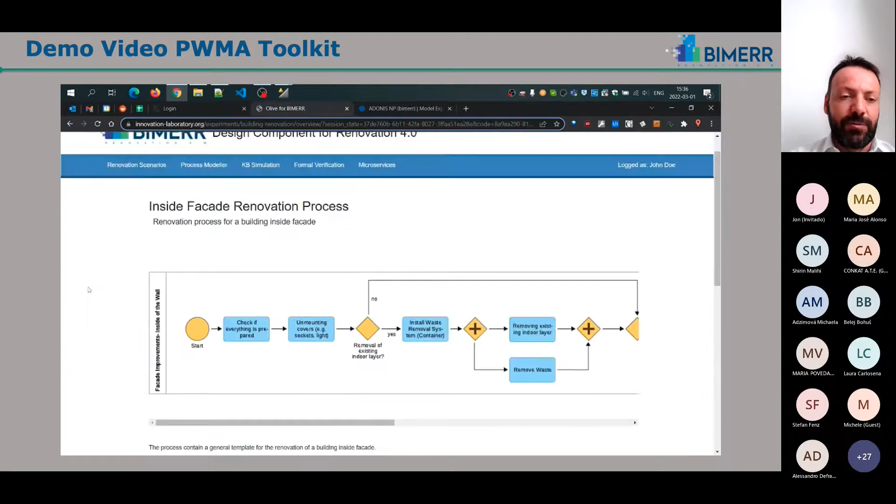So as soon as our model is correct, we can, as said, have it simulated like previously. This is the interface of the simulation, which takes as input the model and the simulation parameters, and then it's sent to the execution engine for execution.

So here we can see that the workflow is deployed and sent to the i3D system for refinement into workflow and execution. And in the next part... sorry, this is the last part, but okay.

Basically, as soon as the process is executed, the component allows also to visualize the status of the process in form of KPIs.

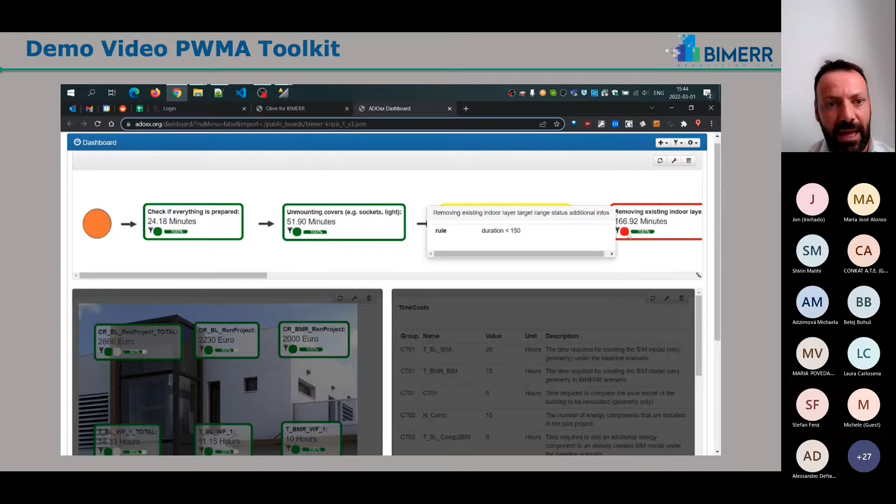So we have the KPIs that we defined in the previous model used to generate this kind of dashboard that visualizes the status of each activity, also with a sort of trustability indicator for each KPI.

For example, we can see that for a KPI based on simulation, the reliability of this KPI is not 100%, but for a KPI measured directly, like reported by the execution system, this reliability is 100% because it's measured and reported by the user.

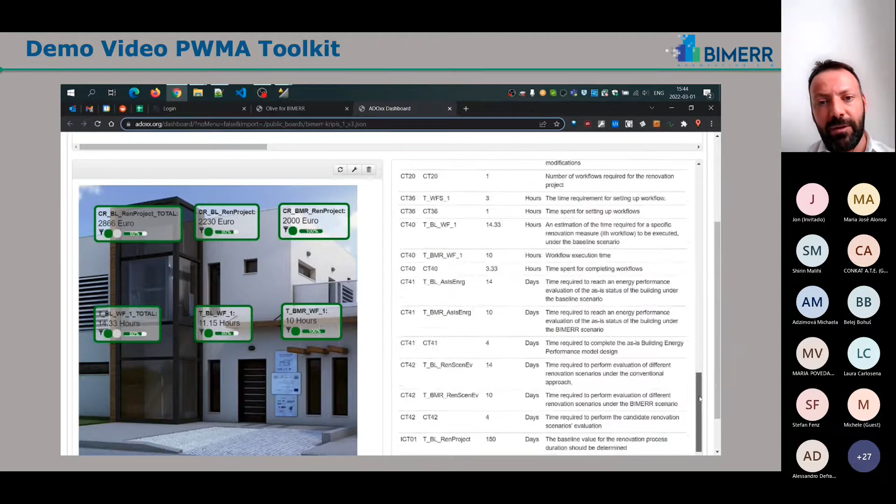And this view can also be customized and contain, for example, all the results of the previously defined KPIs in the KPI models.

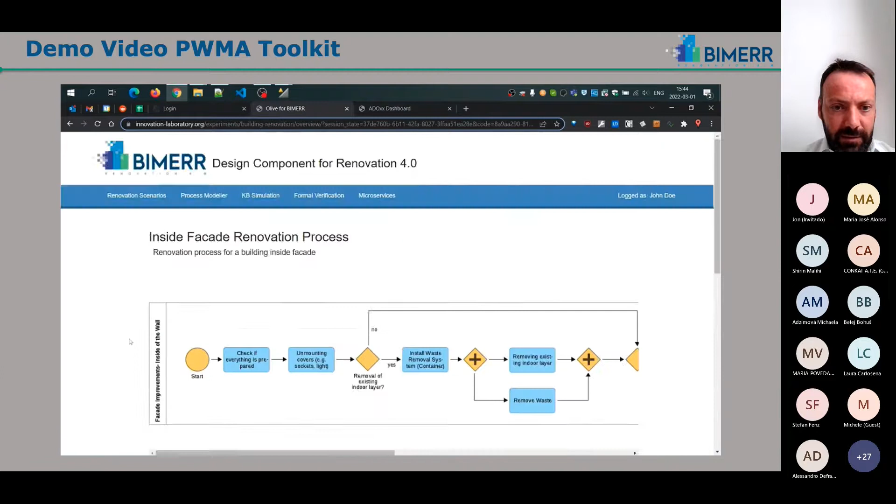We can see in this part also the effective services generated.

So I previously showed the model that is used to create the services used by the automatic task of the activity and by the KPI retrieval. And this model is actually used in this platform, this microservice controller, in order to automatically generate the effective REST service.

So we can have a REST service, as we have seen, for retrieving the scenario from before, for retrieving the KPI values from the execution engine.

In this case, what we are seeing now is the service with all the parameters, so the post endpoint, the post input, and the JSON output that result from the BIMERR interoperability framework platform about the scenarios available for these renovations.

We have a lot of services in this case. I think we can skip this part, but in this case, for example, this is the service used to retrieve the simulation part, and I think this is the last one.

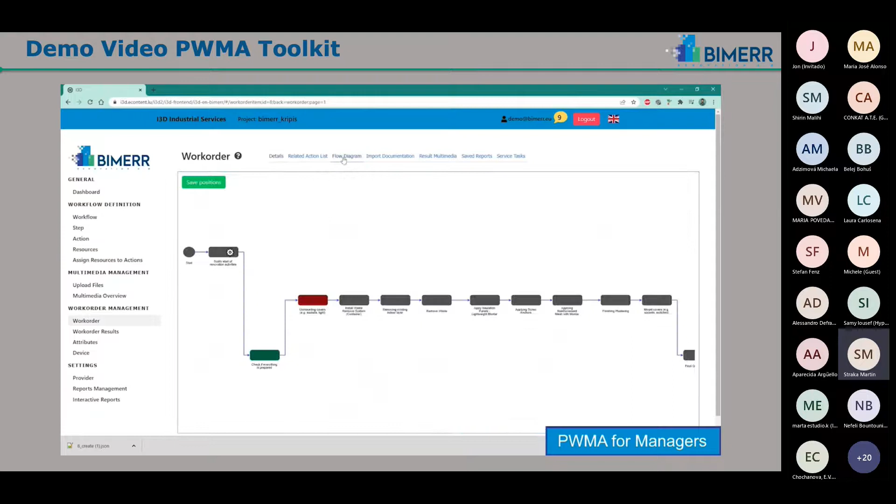Now, when we go back to the PWMA for managers, let's say the worker has just completed the work order. We can see it in the list of work orders. We can click on the flow diagram and see which specific tasks have been completed without problems.

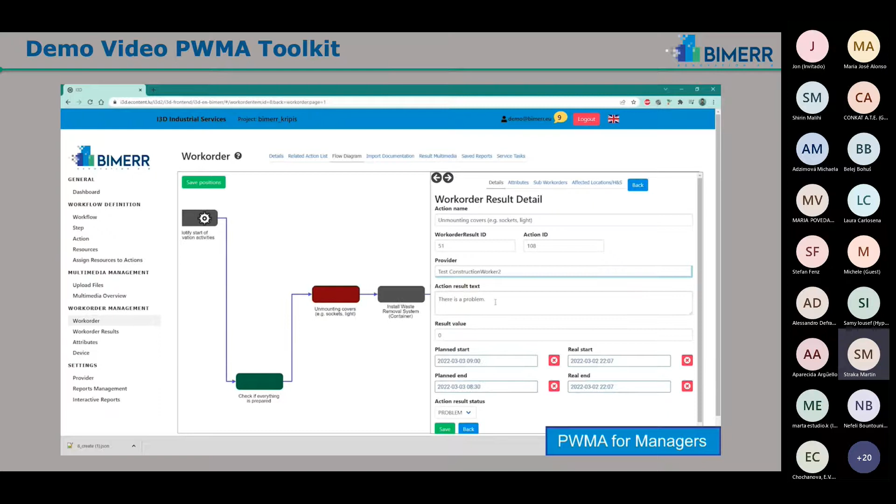We can see the results text and the time of running and completion, and we can also see any problem that was logged. We can generate a printable work order report, which informs us about all the information we wish to know, for example the actual duration of the work. We can see all the tasks with their results and captured multimedia, and we can also see all the notifications created during the lifespan of the work order.

You can also see the notifications that you received as a manager if you click on the notification icon, or you can alternatively log into the notification system itself and check all your notifications right here. Basically, users are mainly notified about creation and completion of the work order, and managers are notified if any worker is starting the work order execution, so they stay up to date. That is all.

The next tool in the process is the PWMA for residents, and here we can see that the user can select the language. First of all, it's a multilingual application since we had pilot sites in Poland, Spain, and Greece. Afterwards, the resident logs into the application with credentials provided during the registration process. This is individually tailored so that each resident gets information that regards only the area around where they live, not areas in the building that do not affect them.

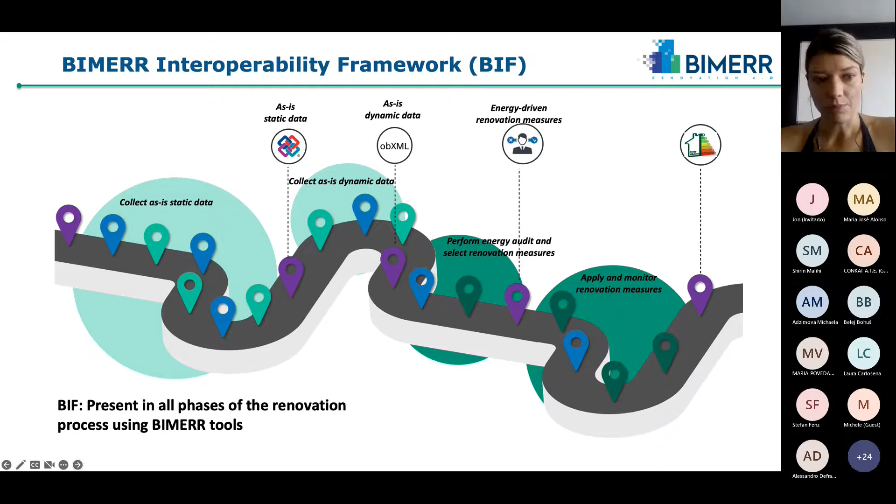Next slide please. So as we said, it is the central point of data collection and exchange among the BIMERR applications, tools, and users. It facilitates semantic interoperability through the underlying common data models that can be used by users in order to appropriately attach a meaning to their data and make them available to other users in a way that is commonly understandable. So the main functionalities offered by the BIF are, first, flexible data collection methods that can be used by the authorized BIMERR users and tools.

Then we have the underlying common data models that can be managed throughout their entire life cycle through the data model management. And we also have mechanisms for the findability and retrievability of these data that are available in the platform by other tools and applications. Next slide, please.

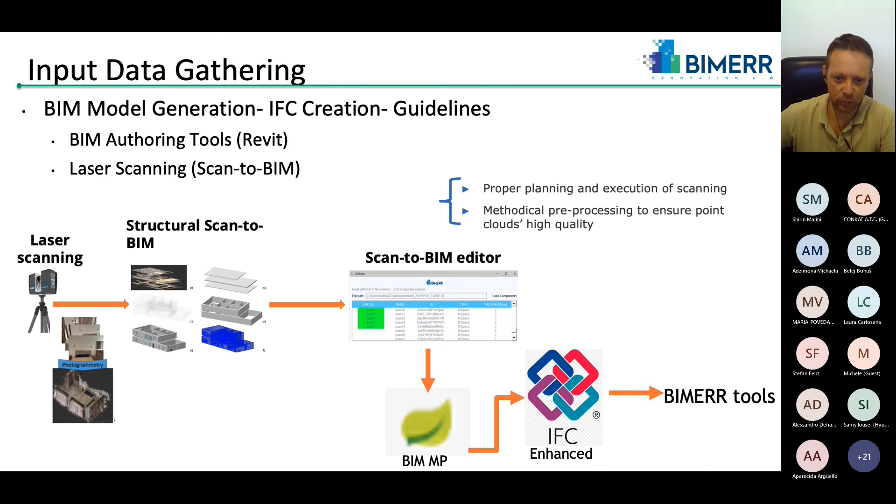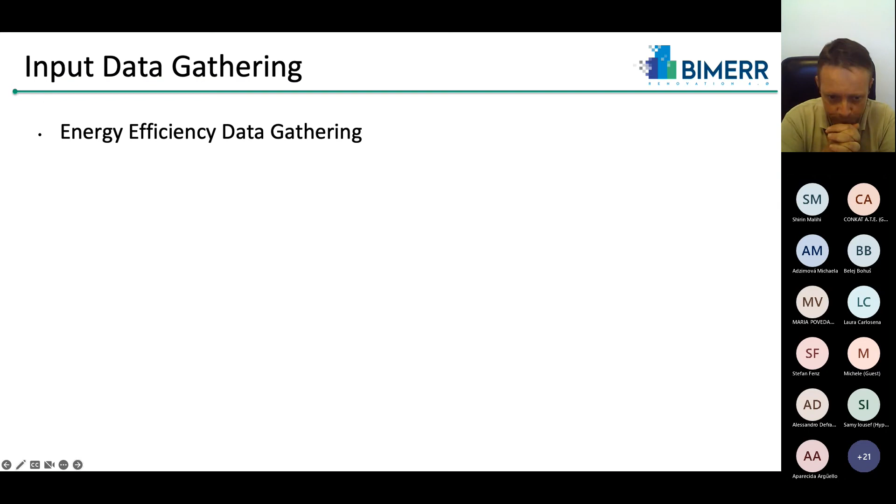Now, regarding the energy efficiency data gathering, namely how to use the sensors placed in the apartments, some details about the environmental product declaration were extracted. The life cycle assessment and life cycle cost of the related building products were looked at very closely. This involves how the necessary energy efficiency information is collected, which is needed for generating the renovation scenarios. So if we start with good data and properly pre-processed data, we can extract better renovation scenarios.

Based on that, we devised guidelines on how static data is defined to be captured within an IFC file, including some naming conventions, for example how to name certain property sets, and the connection of HVAC systems, basically producers and consumers in circuits. Regarding dynamic data, how the set of rules is applied to properly populate instances of the necessary obXML classes and things like that.

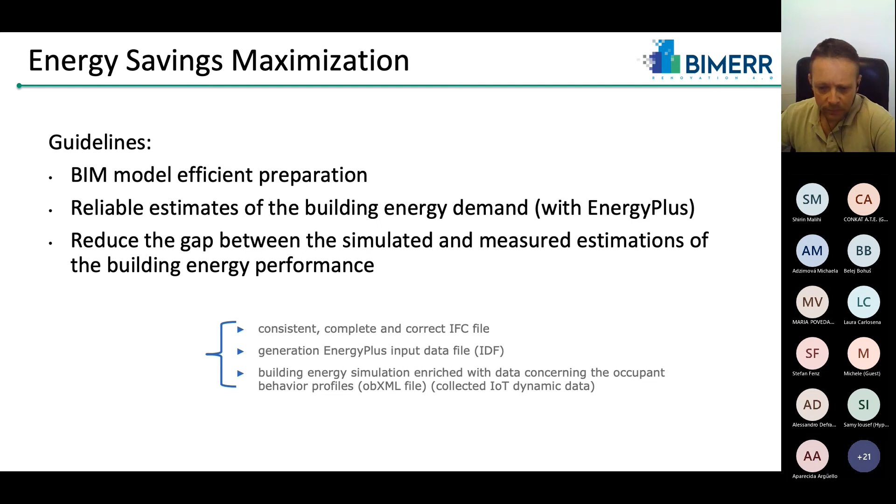And then finally, to perform the building energy simulation with data concerning occupant behavior profiles, using both the collected IoT dynamic data and data provided by the application from the users themselves. This can all be used to maximize the potential of the BIMERR tools with regards to the renovation.

Finally, regarding the applicability and replicability of our results to other countries: first of all, the weather data we are using within the tools is available for 34 European countries. So apart from Greece, Poland, and Spain, where we performed our tests and pilots, the same can be performed in all other European countries through Energy Plus.

The building and material database we have created through the project contains materials that originated from Austria, Germany, and the United States, but they are generic enough that they can be applied with very slight modification in Greece, Spain, and Poland through the pilots. So they could also be applied to other European countries with minimal modification, basically a blueprint for integrating further with different national building material databases.